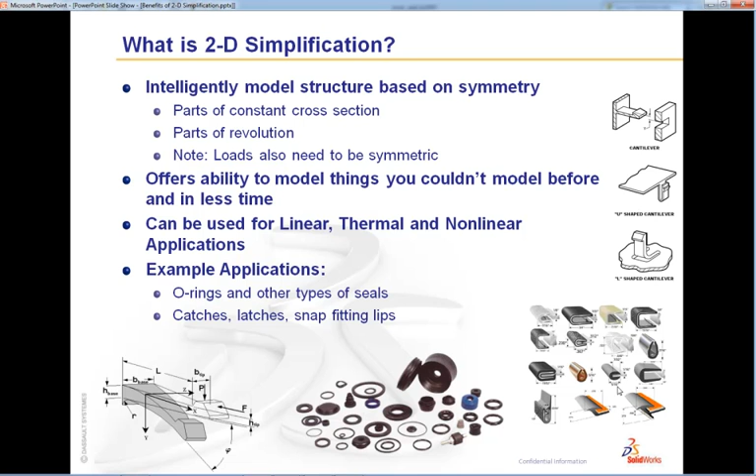Now in SOLIDWORKS Simulation 2011, in the professional version, we've added a new capability to support linear, thermal, and nonlinear applications. And there's going to be a lot of value for that. But let's look at how much value there is.

Now if we look at modeling things as solids, the challenge we have is it takes a lot of elements to get a very refined model. You can see here, just with the default settings, you don't get that much refinement through the thickness or in small elements such as these seals here. However, if we can model that as a 2D slice, you can see by default we get quite a lot more depth of information and accuracy through the thickness of the materials.

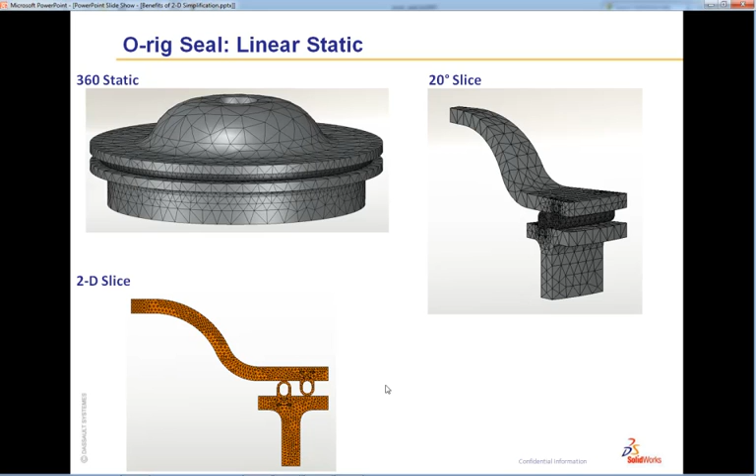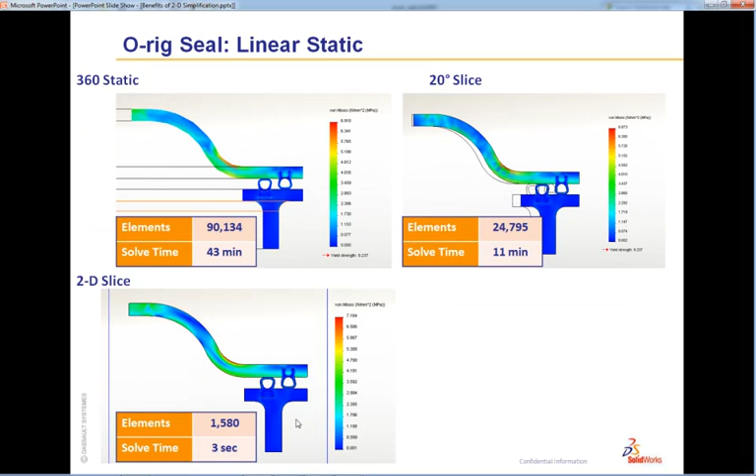Let's take a look at how that works from a solution aspect. We can see here for the full solid it can take 43 minutes to run just a simple static analysis. If we take just a slice of the solid and use some symmetry, we get that down to 11 minutes. However, if we use a full 2D slice, we can get 3 seconds and get the answer. But again, look at that, with a lot more accuracy as well. So it's not only faster, but it's a lot more accurate.

Let's look at the situation of a nonlinear model. Now, in this instance, it's actually completely impractical to run a nonlinear model on the entire geometry. It would take hours to solve. What we did is a little slice of 20 degrees of the model and ran that as a nonlinear model. Did the same thing with a 2D simplification with a default mesh, and then we did it with even a much more refined mesh.

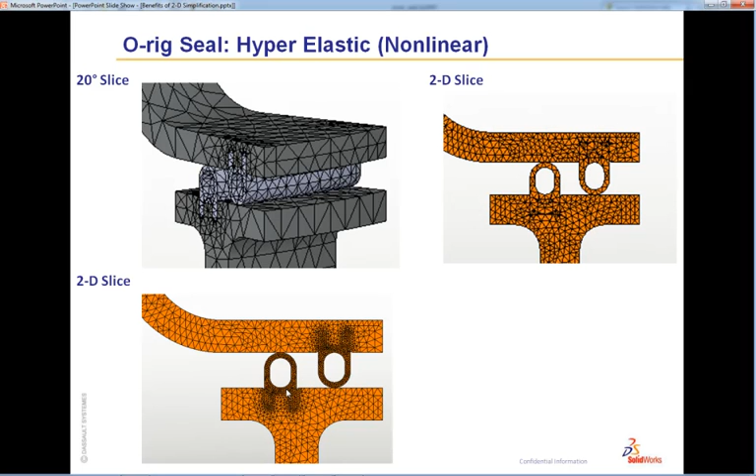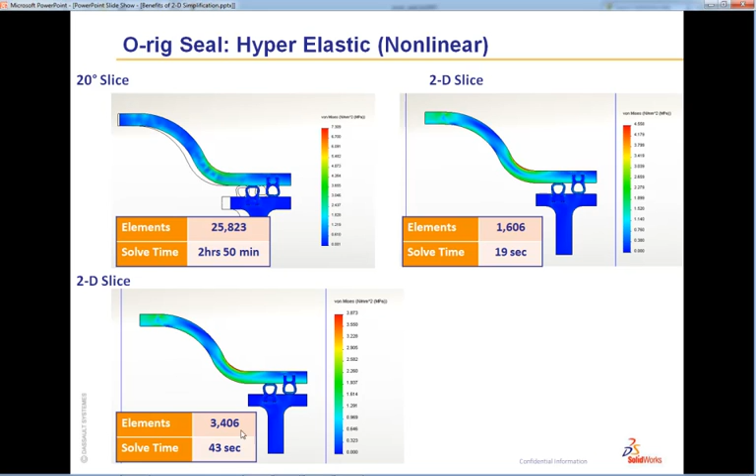Again, looking at the times, you can see it's almost 3 hours for that little 20-degree slice. So imagine what it would be for the entire solid. For the default 2D slice, just 19 seconds. That's just a huge improvement in performance and accuracy. And then when we go to our super refined slice, again, it's only 43 seconds. But again, the accuracy is so much more than what you could get with solids.

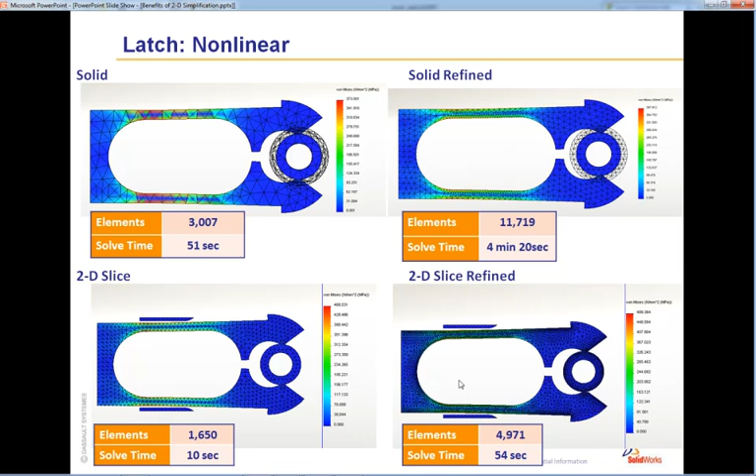And it's not just things that are axisymmetric. We can look at things like latches, where what we do is we take a slice through the thickness, assign it the thickness values, and we can get, again, much more accurate data. Versus a solid model, even a refined solid model, you can see the solution times are drastically smaller, and again, the level of resolution in the results is just so much more superior than what you can get with 3D.

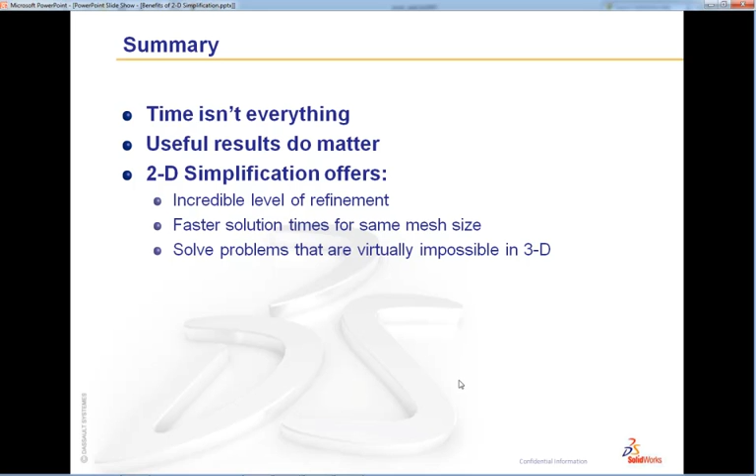So the important thing to remember with 2D simplification is that it's not only doing things quicker, but it's also giving you a much more accurate result that you just cannot get with a 3D model. Let's take a look at that inside SOLIDWORKS.

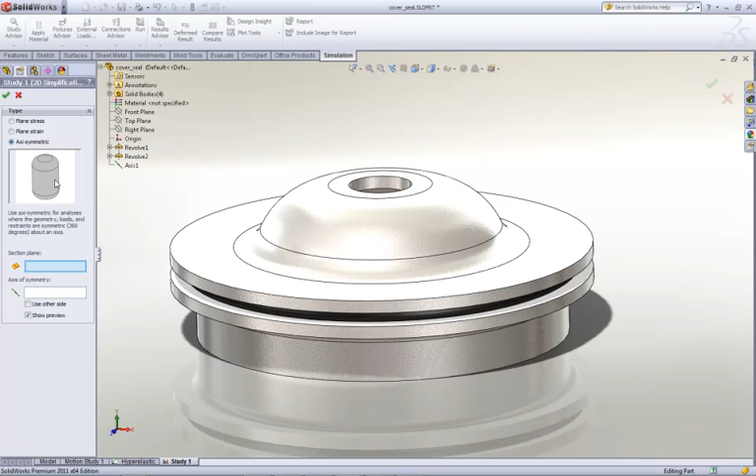For things that are like a long extrusion, like a dam wall, if you want to just do a study on that, you can use plane strain. And then we have axisymmetric for something that's a revolved body. So we're just going to pick this plane that we want to slice through, and then an axis of revolution.

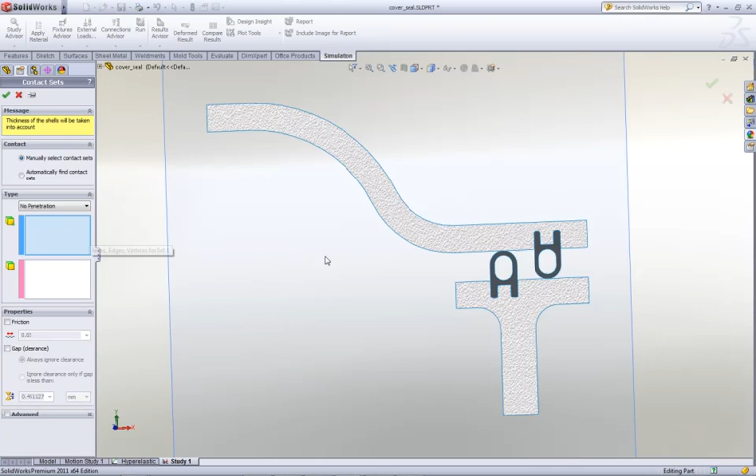And we get a slice done very quickly. You can see it's updated that pretty instantaneously. It brings across the material properties from our geometry straight away. All we need to do is a couple of things. First, I want to define contact that says these seals can't penetrate the solids. So I'll just set those up.

And again, everything's based on geometry. So if the geometry changes, all these locations for fixtures and contacts also change. So just fix it at the bottom. And then we're just going to pull down on the top of the lid and do it 10 millimeters.

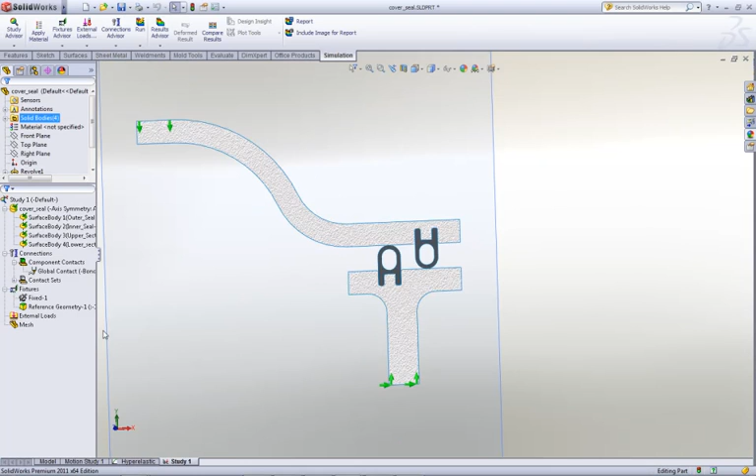Now if we want to do a refined result, we can add a mesh control, and just pick these seals since we're more interested in what's happening in the seal. And one of the things we do have in 2011 is the ability to toggle symbols on and off in one go. Let's just create the mesh to see what that looks like.

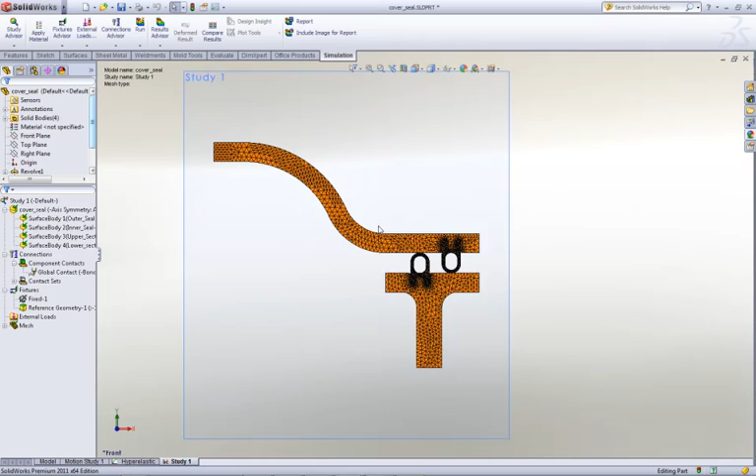And again, the great power of 2D simplification is in the speed as well as the accuracy. So you can see in just a couple of seconds we're going to have results back for our analysis, which we can animate, but some people find it hard to look at a section to interpolate, so we've provided the ability to take that back onto the 3D geometry.

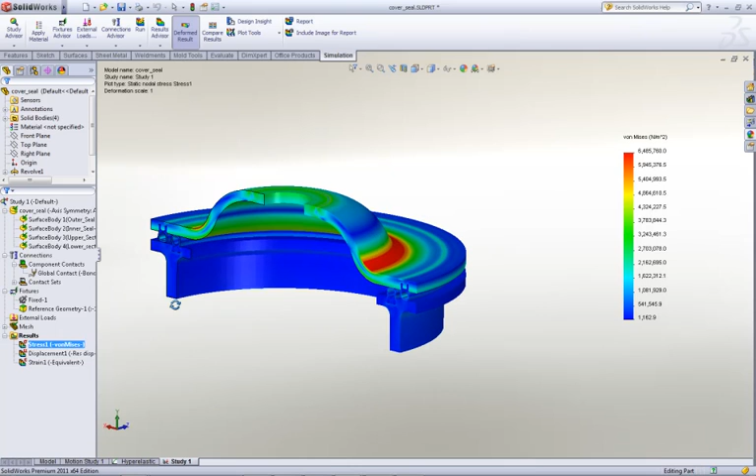So we'll do it on a half of the section, and there's our profile. So it makes it a lot easier for people to understand what's going on, and of course we can animate that as well. And as I said, the same thing when you want to take into account the nonlinear rubber: again, the solve time is very quick, and again the results are very accurate.

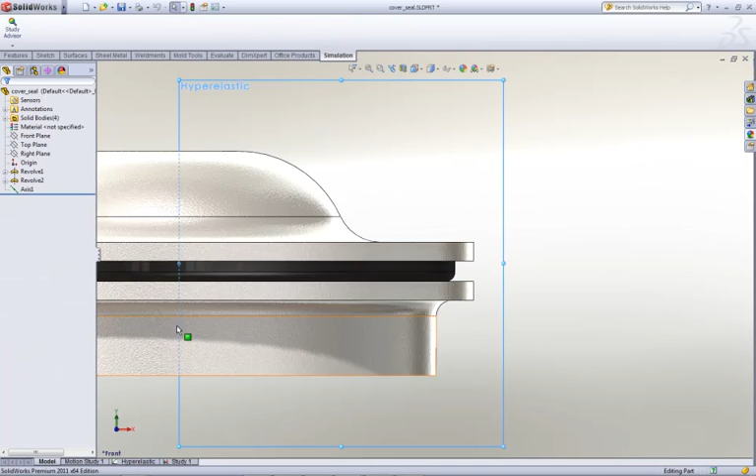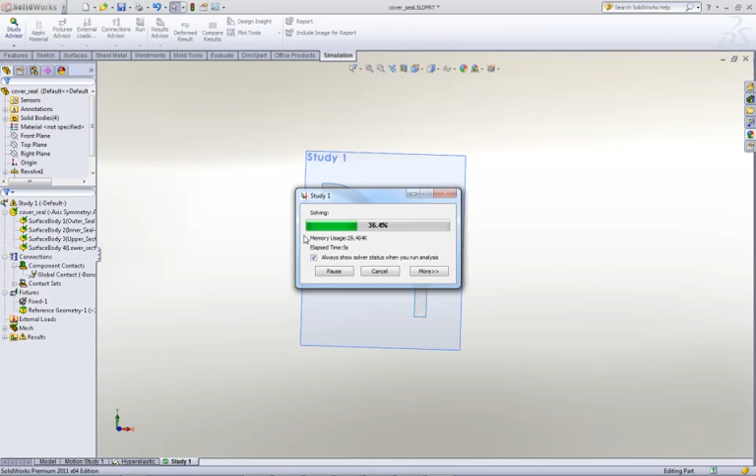Now, what about a change? Again, I mentioned it was parametric. Let's just see how that works. Let's just change the height of this to 500. And you'll see when we go back to our profile, it's automatically updated. Just click on Run. And again, a matter of seconds, we've got a new result. So it's incredibly quick and efficient, and as I said, it's a lot more accurate.

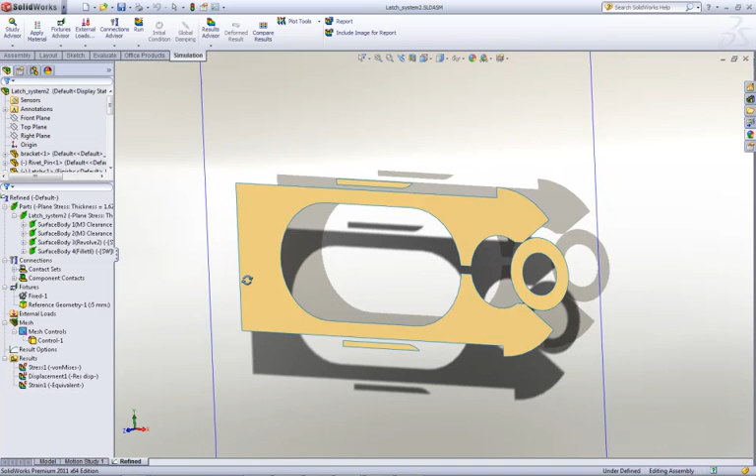Look at the latch system. In this case, what we're interested in really is the latch closing over this pin, and we can do it by accounting for the thickness of the latch. And again, it's just a matter of seconds. We can run the study and get the analysis out. So we can animate that so you can visualize that.

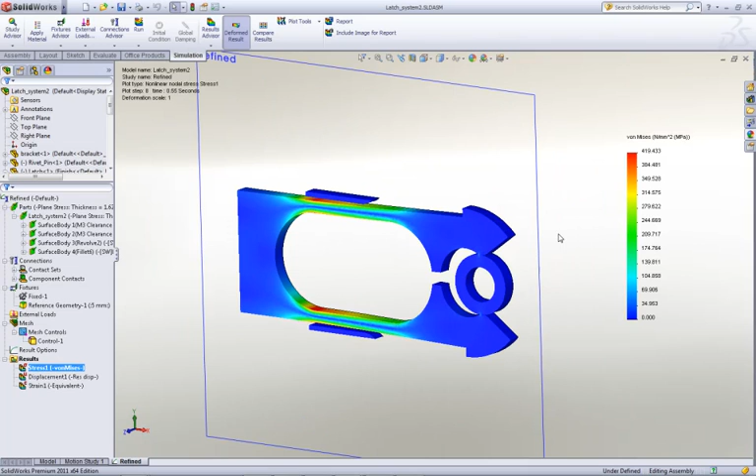So we can come in here and really optimize the thickness of these arms here to ensure that it doesn't require too much force to lock onto the latch. So it's a very powerful tool to enable us to understand lots of different applications very quickly, very efficiently, and also very accurately.